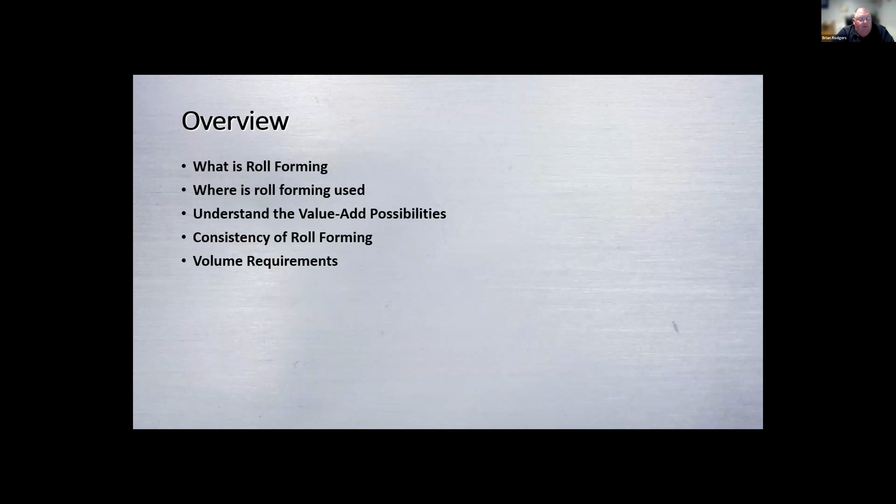We're going to understand why the roll forming process has the ability to add value by adding other processes to the roll forming line. Instead of just running a commodity, you can run a product that has more engineering and more processes built in. It may not run as fast, but at the end of the day it gives you a complete part without secondary or third operations. We're going to talk about the consistency of roll forming, and at the end, about the volume requirements that trigger when roll forming becomes the better option compared to other processes.

So when we look at roll forming, the first question is, what is it? Many people know what an extrusion is, what press brakes are, and what stampings are—some learned it in metal shop, some just heard the terminology in the industry. But when you bring up the term roll forming, sometimes people have no idea what it is. They may even have a roll former in their facility and not realize that's the operation. So we're going to see how roll forming is similar to these other processes, and also how it's different.

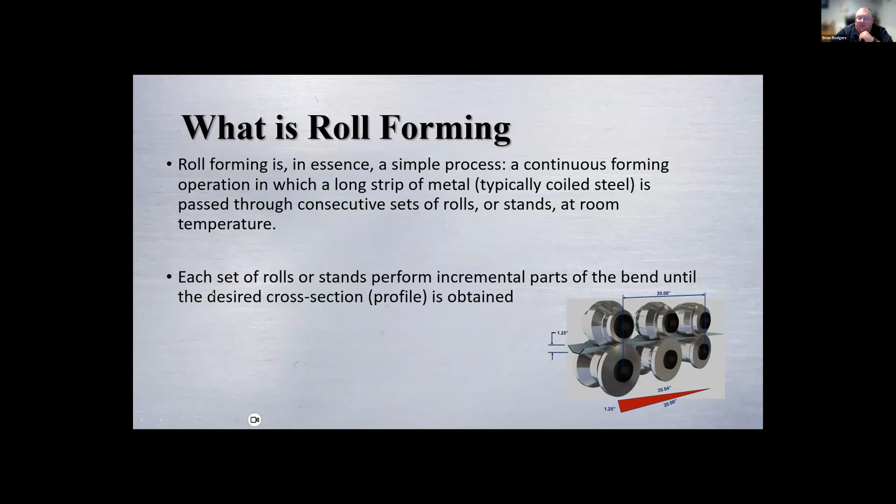So the question is, what is roll forming? Basically, roll forming takes a strip of metal and continuously forms it into a shape. As you see in the diagram, the material passes through rolls or stations. This is done at room temperature, and each station creates a bend, bend after bend, until it achieves the desired cross section. Each one of these steps is called a pass.

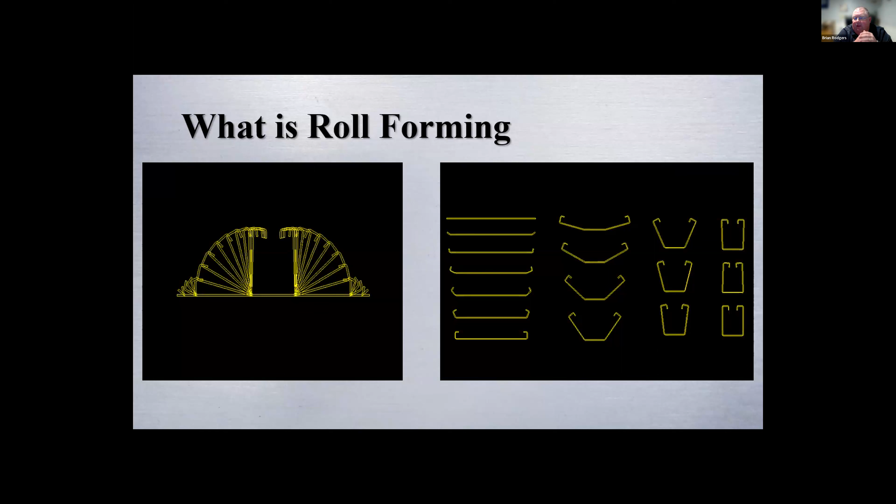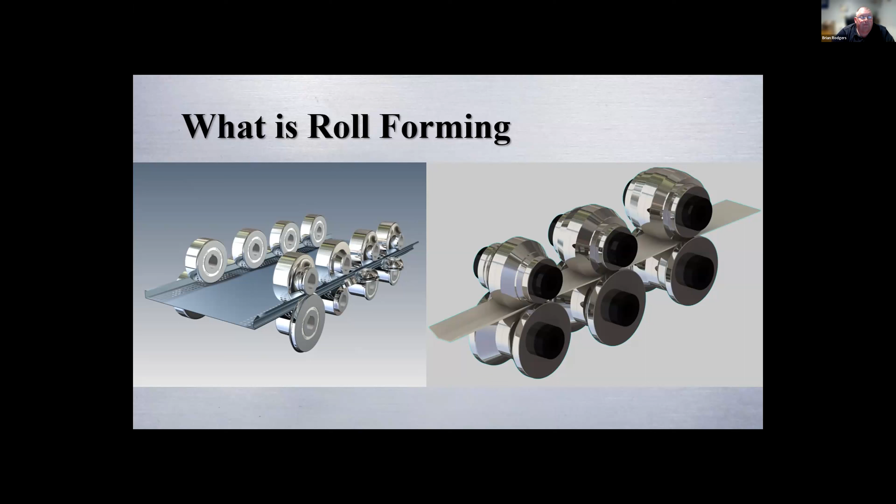So where is roll forming used? Here are some examples. In the automotive industry, Carl Yoder, who started the Yoder Company, and John Tishken, who started Tishken, had most of their machines in automotive. They had contracts with Henry Ford and other automotive suppliers in the Detroit and Cleveland areas, producing roll formed products for cars like running boards and other parts. The appliance industry also uses a ton of roll formers—everywhere from water heaters to refrigerators and ranges—with all different types of parts coming off a roll former.

The new buzzword, solar. Solar has been a really great fit for roll forming because it usually needs long parts, and roll forming does very well at producing long parts. The aerospace industry, if you have flown in an airplane, most of the stringers or the ribs of the airplane come off of roll formers.

They're used there. Office furniture, if you're sitting in a cubicle, I would say probably 99% chance that your cubicle's post and the interior pieces of your cubicle came off of a roll former. The construction industry, which is a lot of what MetalCon goes towards, your steel studs, furring channels and drywall stuff, that all comes off of roll formers.

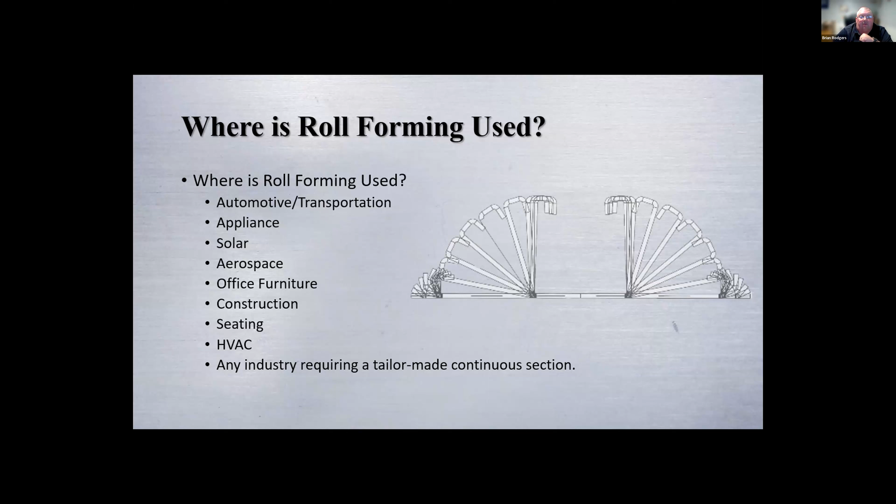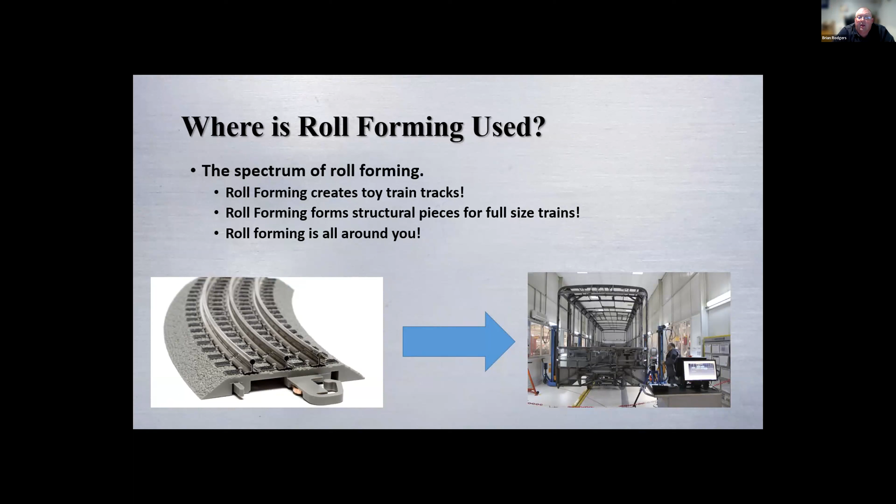So we're going to talk about some different advantages. Basically, roll forming offers many distinct advantages when it's compared to alternative metal forming methods. Most of these come from the ability to accurately process a variety of raw materials. We're going to talk about the different raw materials that can go through a roll former.

I hit real quickly on the multiple lengths that you can have the same profile, whether it be a 4-inch part to an 80-foot part. And the biggest thing that roll forming loves is high volume. It loves to make a lot of parts.

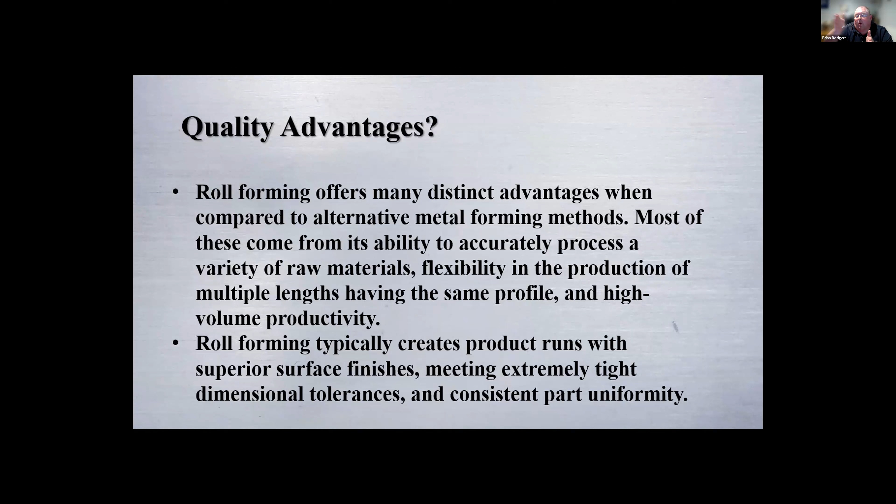Roll forming has the ability to run critical surfaces, whether it be stainless steel or pre-painted, different materials like that. By the way it forms the process, a lot of times it's able to create the cross section without cracking the coating, and it's able to give you a finished product, keeping it from going to another operation to either go through a buffing station or painting.

The range of roll forming, it can be less than 10 thousandths thick material to right around 1 inch thick. 1 inch is not very common, but 250 thousandths, 300 thousandths is pretty regularly done. Basically, you got to look at your bend radii and understand that. If you're at MetalCon, I do talk about materials, but the biggest thing is can the material withstand the bend that you're putting it in? And if it can, a lot of times roll forming can take care of it for you.

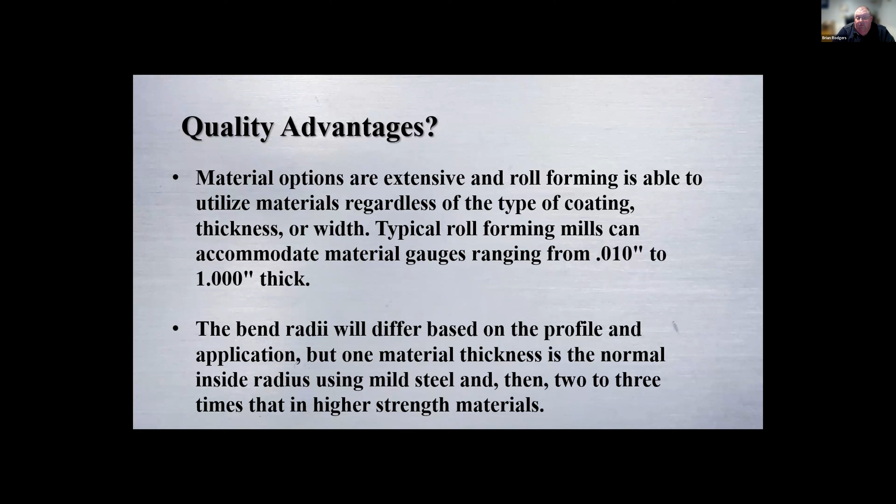It also has the ability to build mild steel, or as you hear in the automotive industry and more, your HSLAs or your high strength low alloy steels. Getting up into martensite materials and 80 KSI type materials are roll formed quite commonly now.

So here's just another list of some of the materials, and here's some examples of parts. Aluminum. I've been doing this for 20 plus years, probably pushing 25 years. And every time I've seen the aluminum prices go high, you see a lot of inquiries to start changing their products over to galvanized steel. And then when aluminum goes down, you'll see it go back the other way. I'll talk about some of the reasons for that later. You can roll form titanium, stainless steel, your commercial grade steels, your high strength low alloy steels, boron.

I've read an article about somebody who built a roll former and ran steamed wood panels through it to put a bend in it. Granted, it was a very tight bend, but that's what they were doing. I've also seen roll tooling made to roll cardboard. There's a lot of possibilities with the roll forming process, and I won't say I know all of them, because sometimes there's stuff out there that even surprises me. But understanding the process, knowing that whatever you want to bend can withstand the bend, means it has a possibility of being able to run through a roll form.

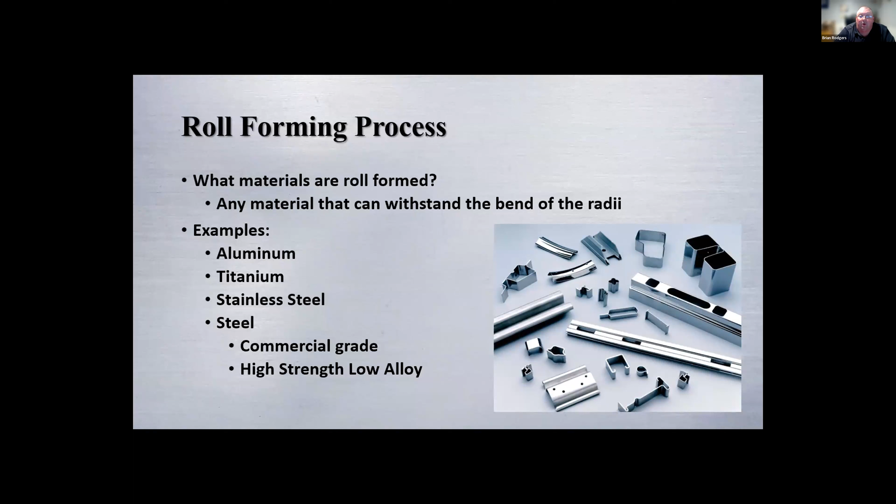So when we're looking at our products, real quick, kind of gut-checking: a lot of us know what stamping parts are. Obviously these stamping parts here, they're not a continuous shape, so that's the world they'll always live in. You're not going to do those on a press brake, you're not going to do them on an aluminum extrusion. That's pretty much their niche.

But now when we move over to press brake parts, a lot of times they begin as press brake, but as the volume goes up, they turn into roll form products. Like this product here, yes it's short, and depending on your volume it could be roll form. But if you need different lengths, this is a perfect roll form part because it's a continuous uniform shape. Then as we get into roll form products and want to start adding value, look at these parts - there's holes in them, some welds, and also the ability to marry two different materials together inside the roll forming process to have a tailor welded cross section, if your coil is welded with two different thicknesses, or you just bring the two together. We'll talk about that more later on.

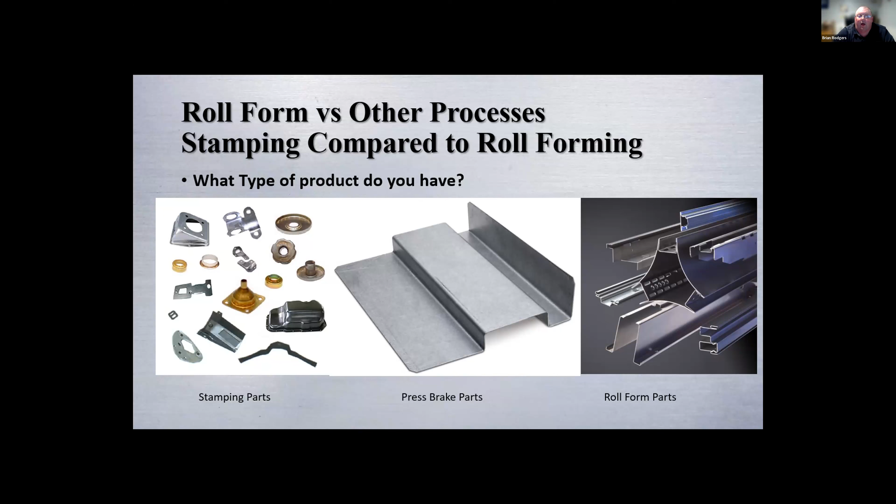So here we're going to talk about stamping. A variety of sheet metal forming manufacturing comes off of a press, whether it's punching holes, blanking, flanging, or coining - that comes off of it.

So when we compare the two, here's what happens. Roll forming usually holds the advantage in length, because if you're only going to stamp a 4-inch part, your die is very small. Let's say though the part is going to go on an automobile, for a side door on a minivan - well now that press bed's got to be maybe 36 or 48 or 60 inches wide. Let's say we want to put a sliding door on the side of a bus - well now that press bed's got to go to 80 inches or 120 inches.

With roll forming, usually now with the way controllers are, we just go to it and tell it to make an 80-inch part, make a 120-inch part, maybe we want a 400-inch part. We just tell it to do it, and it can make it very quickly with the same tooling and the same die tooling to produce the part. Where in a stamping die, that die has to grow because it hits one time and then it's done.

The tolerancing - roll forming is very consistent when it comes to the profile. When it's forming the profile from the beginning to the end of the coil, it will hold the tolerance very consistently as long as the material going in isn't fluctuating. It's the old rule: junk in, junk out. So if you're holding a good tolerance with your raw material, chances are you're going to have a very nice, consistent process going through the roll former.

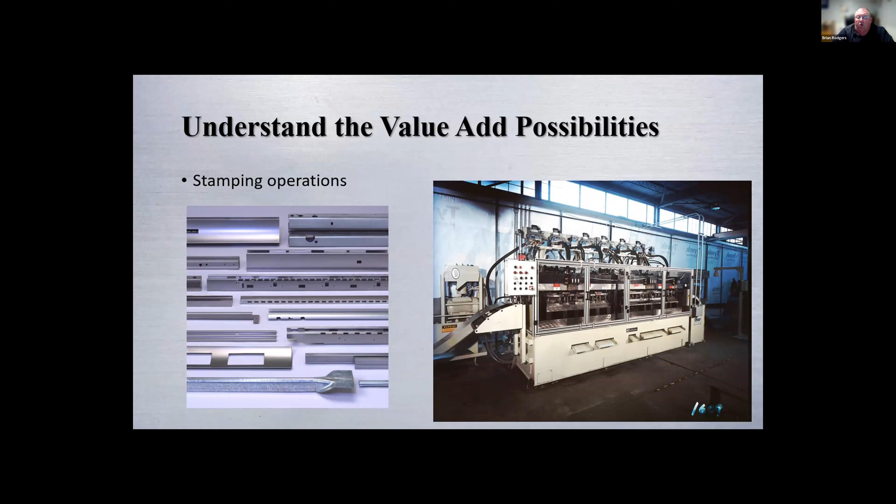As you can see, the material has gone through the press and it's coming out, getting ready to go to the roll former. So we've put a stamping operation in front of the roll former to create the ability to make different cross sections. As you see on the left, different roll form products, these all are in one process. So when the part is cut off at the end from a continuous coil, that is a complete part with all those holes in it.

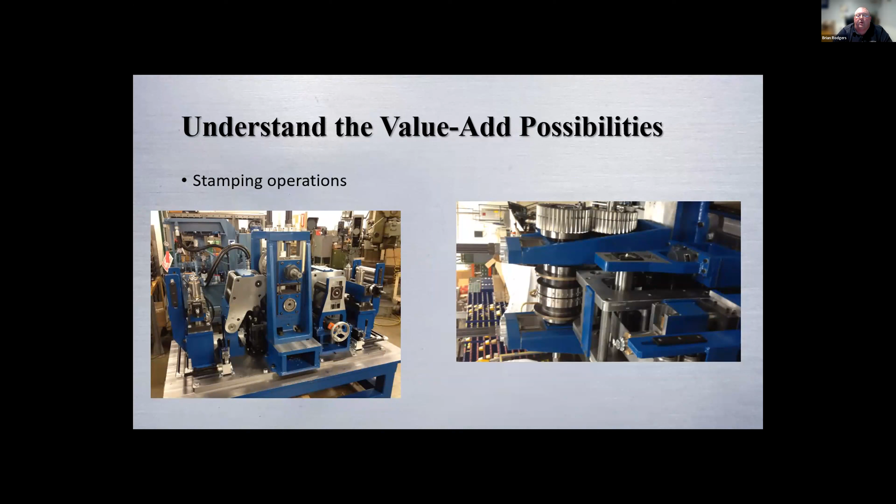Here's another way. Instead of just doing it with a press, we have what we call a rotary, where you can put that on. As you can see, this can run at high rates of speed, and it can put a continuous hole pattern in the strip before it goes into the roll former. We see this done a lot in the metal building industry on certain products.

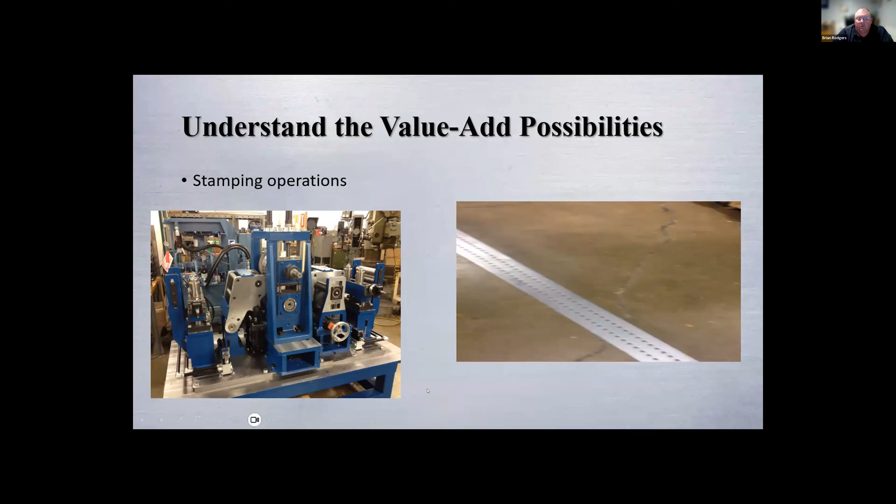So now we're going to talk about aluminum extrusions. In the aluminum extrusion process, they take the billet, heat it up, and kind of like pushing bubble gum through the dies, it creates different profiles. Very, very tight profiles, very good profiles, but there's no value add to them.

It's just the product. So when we compare them: length, yes, aluminum extrusion can make very long parts or very short parts. Tolerancing on the profile - aluminum extrusion holds very tight tolerances on the profile. But when it comes to putting a contour in the part, or a sweep, you have to go to another operation to do it, where we can do it in line on a roll former.

Tooling cost - as you all know, if you do aluminum extrusions, tooling is usually very inexpensive compared to roll tooling. But when you get to high strength materials, they call it aluminum extrusion for a reason, because that's pretty much the only material that can go through it. Otherwise, the metal you're pushing through it is the same as the metal it's going through, and it will destroy the dies. So when you're looking at those processes, that's one of the key things about roll forming - the ability to run different types of material, not just aluminum.

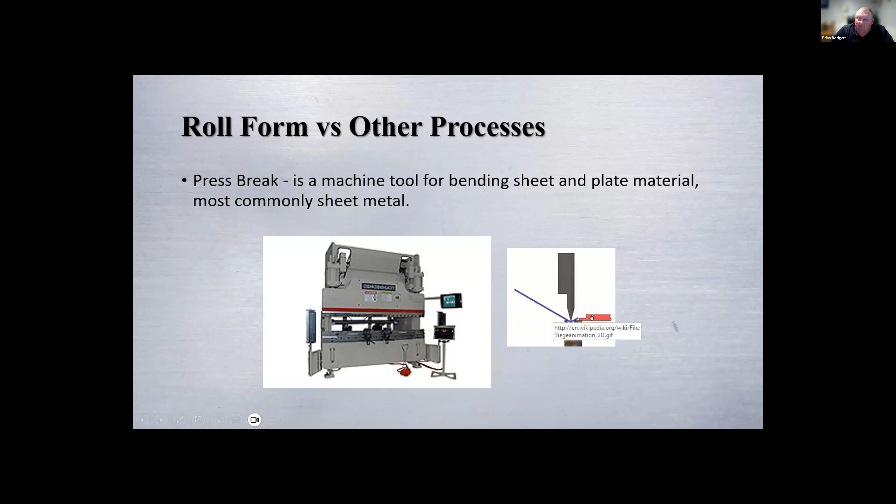So when we look at it, roll forming - like I said, we can run a 400-inch part, we can run an 80-foot part. In a press brake, it's how big is your press bed, right? Do you have a 30-foot long press brake? More than likely not.

Tolerancing - because of the way the press brake process is, you're hitting one spot, pulling out, and going back in. Roll forming gets tighter tolerances than press brakes. Now, yes, there are press brakes out there now that will hit and hit until they get it exactly right. But you're losing cycle time, where in roll forming, you're just passing through the rolls and getting the same tolerance, but at a higher rate of speed.

Sweeps - again, if you're making the profile on a press brake, you're not putting a contour in the part, you're just making it. With roll forming, we're forming the profile and we have the ability to put the sweep in before the operator even touches the part.

Tooling costs - as we all know, press brakes are pretty common, very inexpensive, but how many times do you have to do a tool change to get a part done, depending on what the profile is?

Where in roll forming, once you design the rolls and the rolls are on the machine, it's going to make that part all the time. High strength materials can be done by both, yes, but you have to play around with setting those hits and getting that radius set coming off of a press brake. In roll forming, we're passing through the rolls and the way it's forming it, it's bringing it up. Once we have that, it's very repeatable to load the tooling, take it off, put it back on, and achieve that same tolerance and consistency, even with high strength material.

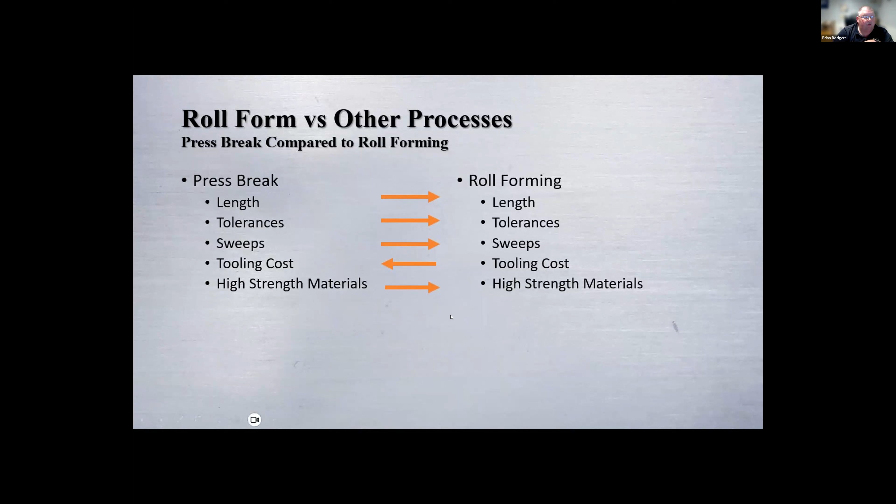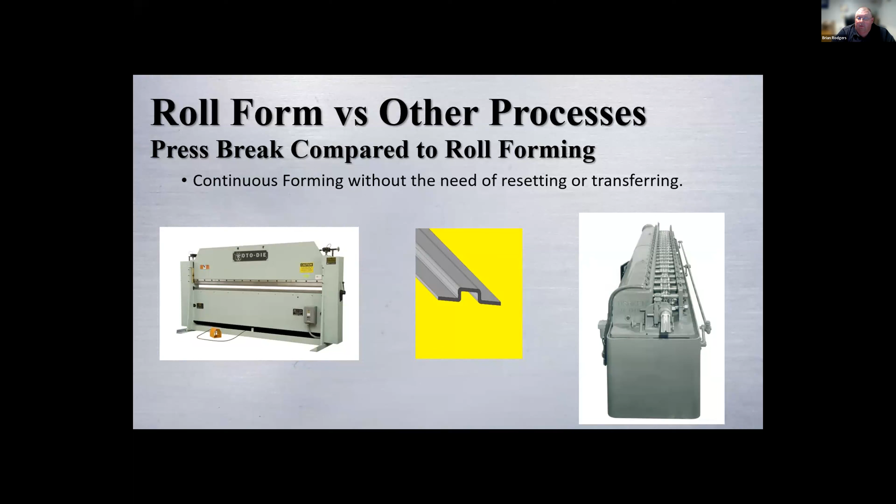So you've heard me talk about the consistency of roll forming. When we're looking at that consistency, you can see the material coming in. I like to call this the forming V, because if you're standing at the exit end of the roll former and look down, or at the entrance end looking through the tooling, this is what you see. The material comes in making a V to finish the cross section. It's flat, it bends its edges, comes in, and then you see it starting to lift. As it carries through from station to station, it's producing the final product.

A lot of times, if you think of a progressive die in stamping, it's hit to hit to hit. But instead of a transfer or a person picking the part up and moving it to the next station, we're just traveling through. Instead of our ram coming up and down and stamping the part, we're rolling, just passing through and bending it as we pass through.

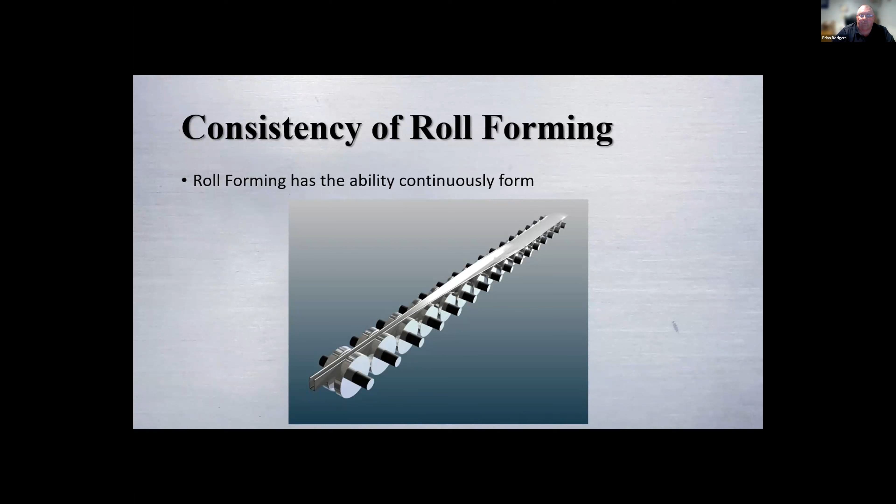So when we look at the ability to form a profile, a very standard tolerance is plus or minus 30 thousandths of an inch on any dimension. Can we do tighter than that? Yes, we do it all the time. I've seen plus or minus 20, plus or minus 15. I've also run certain products like seat tracks where in certain areas of the cross section we're holding plus or minus 1 thousandth of an inch. Now, granted, if we're holding that tight in one area, we need a little wiggle room somewhere else, so we can't tolerance the whole thing at plus or minus 1. But there are certain areas of a cross section where you can achieve those types of tolerances.

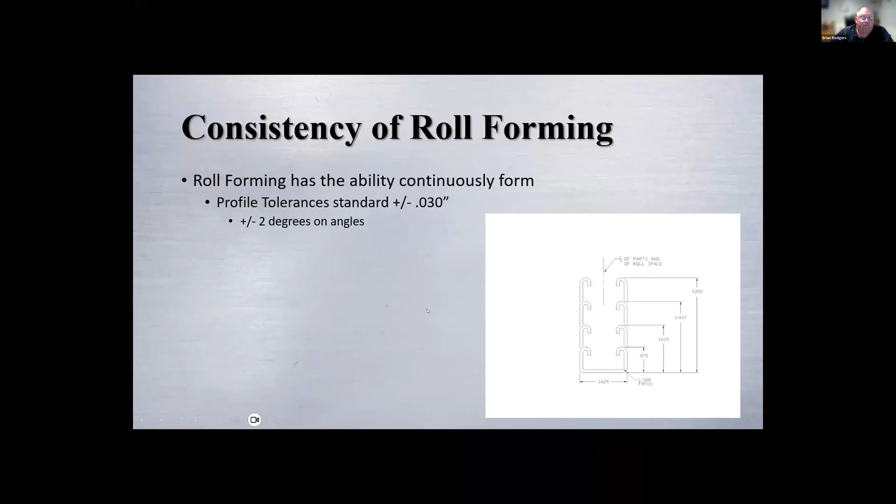If you're taking notes, this is pretty good, these are very attainable roll forming profile tolerances. If you're talking fractions, it's plus or minus 1/32. For 3-plus decimals, plus or minus 15 thousandths. Certain dimensions can be plus or minus 5. Like I said, in certain products we've gone tighter than that. But you start talking about the material, the profile, the machine, and everything, it is achievable. Sorry about that.

On straightness, usually it's 1/4 inch in 10 feet. That's for the crown of the part, the sweep of the part, or twist, when the part comes out and wants to go clockwise or counterclockwise, we're able to hold those.

I do a lot of estimating and putting lines together, and my thing is, I need to know what's important to you. Because if I sell you a machine that holds plus or minus 30 thousandths of an inch, and you're just measuring with a tape measure and don't care if it's within a half inch, I could end up selling you the wrong type of machine that holds a tighter tolerance than you need. We can focus on what you're really needing.

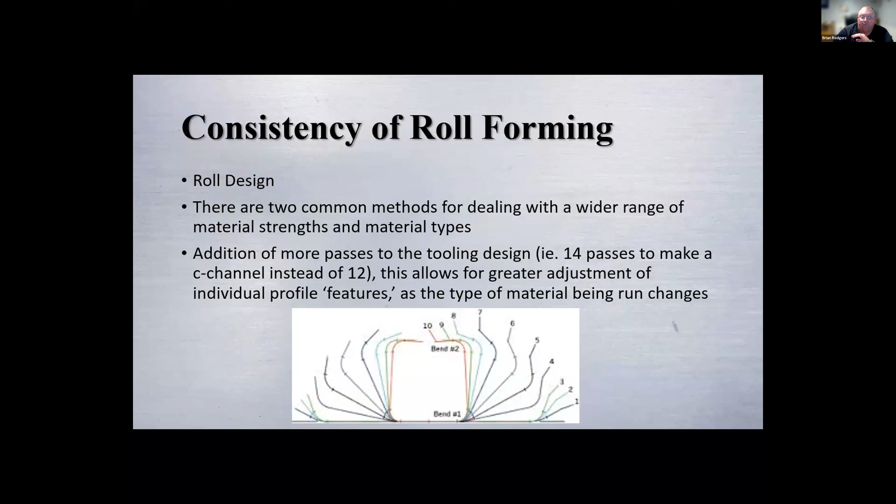Can you do better? Yes, it's done better all the time. It really depends on your material, whether you have the right machine size, and if the tooling is correct. Camber or sweep or down bow, everybody has different terminology for it, but it's 40 thousandths in 40 inches, and bow is 40 thousandths in 40 inches.

Just a note, if you're looking at a roll former, or have a roll forming process and want to add automation, which is a big buzz now because of labor shortages, make sure the tolerances of the machine supplying that match what the automation needs.

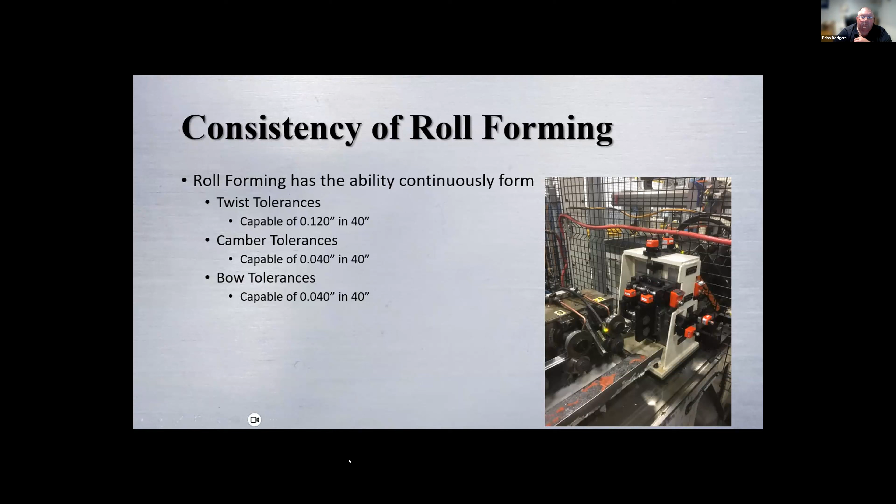So as the part profile is produced by the roll form tooling, it goes right into this operation, and we're able to manipulate that part to go left or right, up or down, or even come out with a purposeful helix or twist to follow wherever it's going to go.

Drum rings, if you think about it, those come off of roll formers and sweep units. Bicycle tire rims, motorcycle tire rims, those all come off roll formers. They go through what we call a shoe, and it comes in and makes the circle, and you cut it, and then a lot of times the rim comes down and the operator just butt welds the rim after it's cut. So you have one operator taking the material from a coiled flat, coming in, and making a finished product. It's one operator going through all those operations because they're all tied together.

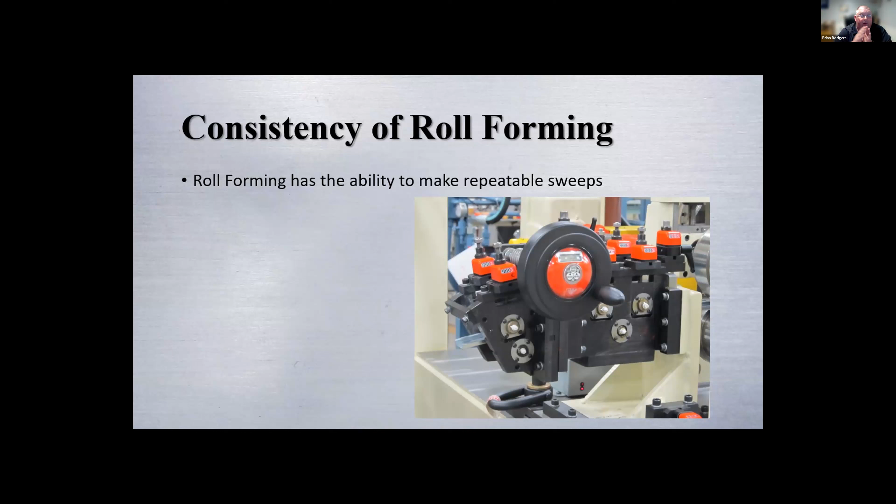It will do both. The one thing I will tell you is if you are going to blank feed a roll former, you'll want to make sure your minimum length is 3 times the horizontal distance. I don't talk a whole lot about that here, but I will at MetalCon, where that measurement comes from. There are tons of products that come through a roll former from blanks, not from continuous coil. Why? A lot of times you don't have to buy the extra presses, and you don't have the volume for it, or you don't have the room, and you just run your blanks through and you're very happy with the product.

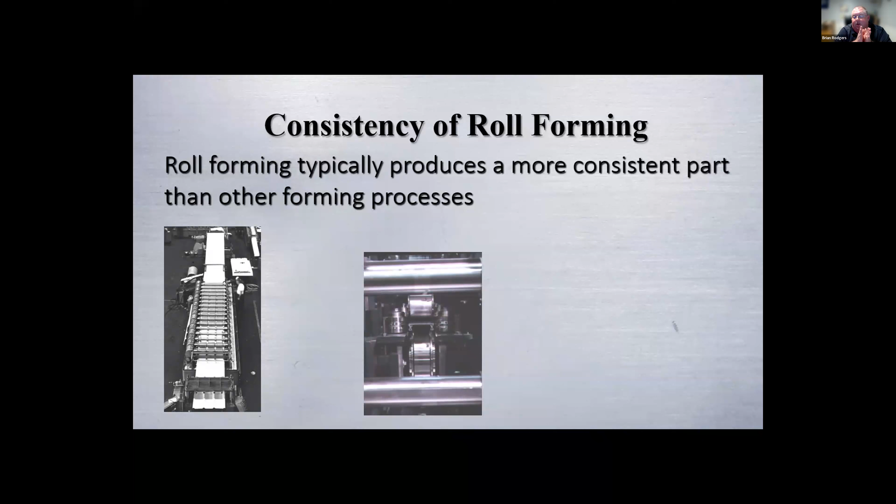But this comes off very consistently, because when it comes together, they want to make sure that a 105-pound person who's going to move the seat forward and back on a car can do it with the same amount of effort as a person who is 6'5", 295 pounds. So it's very important that part of that cross section is held that way, so that when they put these pieces together with the ball bearing, the efforts are within the allowable tolerance.

Here's another example of different sweeps that come off the part. As you can see, this is an automotive cross section. It's really hard to tell, but it's actually bending in multiple directions, so it's got a helix in it. This is a part that would come off one of those shoes. You can see how tight the diameter is. Some of these other parts have a small crown in them, or could just be straight, just to show you what can come off a roll former.

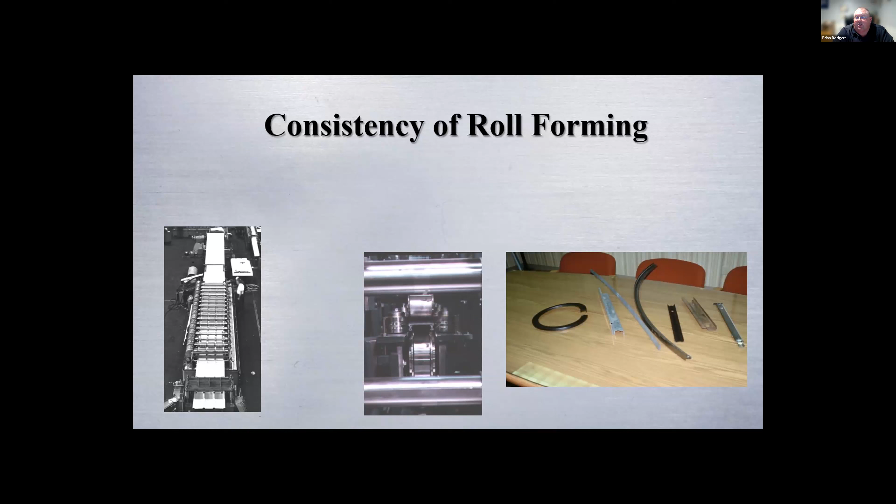I used to work in the automotive industry for a while, and we would go from product line to product line and use the same cross section, but we would put a different, they called it cord, but it's basically a different sweep in the part. So one might be more gradual, one might be sharper, depending on the vehicle it went on. We would just change that with the sweep unit, and we wouldn't even change the tooling. So we were able to change over very quickly, utilize the rolls, and make the same cross section, but completely look different when it came off the line.

When I talked about the flare, this machine here is an anti-flare device. What that does is help set the end of a profile. When it cuts off, it does flare out beyond the tolerance, and we're able to monitor it and set it automatically on this type of machine.

There's a lot of different ways to take care of flare. You don't have to be as elaborate as this. We can put different things in the tooling, different side stands or different side rolls, to help work with the roll tooling to eliminate flare. These are just some examples I wanted to show you.

Here is an example of a blank fed line. It's one of those dual head or duplex machines that I was telling you about. Another one is a continuous coil going through multiple operations. We're going to talk about the one on the left here, the dual head machine.

A lot of times these are used when you're doing different size panels, and all you want to do is form the outside edges. So if you have a 24-inch wide sheet and you want to form just the edges, you put that profile you want on each edge. But let's say your next product line is 36 inches wide - you just move the roll former, it'll index out, allow for that wider strip, and put the exact same profile on the side.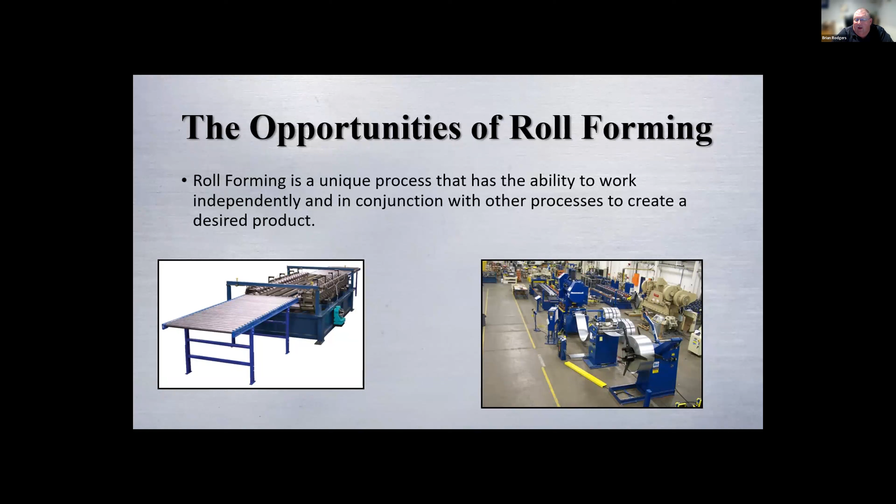Also refrigerators - the one we see on the right is a continuous coiled machine with a pre-notch or pre-punching operation. So we put a stamping operation in line. It comes off the coil, going through a straightener, and when it comes out of the straightener, it goes into the press. The press puts whatever features are desired for the product, then it goes into the roll former, which creates the profile, and then it's cut off.

Here is a little different example of that blank fed line. This line is actually taking sheet of steel, putting it on - the roll former is back here. It's coming through, bending the edges, and then it comes into another operation where it actually forms the exit and entrance end. These blanks are coming in from a stamping operation with the embosses in it.

As you can probably tell, this is a door. This roll former is able to run all the different door families by putting the profile on the edges, and then this other operation puts the features on the end of the part. That gives you one operator and a complete part when it comes off - the savings come from adding all that value into the process. It's not just a roll former, it's a stacking operation, a roll forming operation, and a press operation.

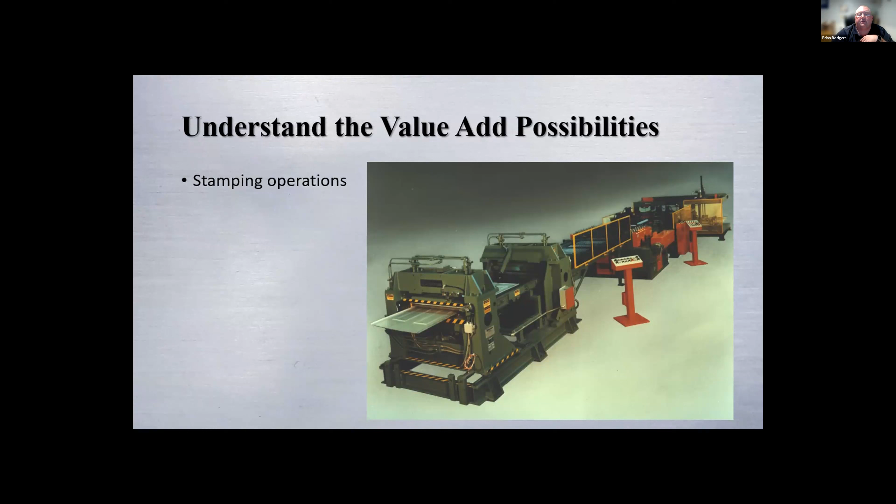And this machine here - let's see, it's supposed to move it back up. I was supposed to play it larger for you all to see.

But we can watch it. It goes through, you have a cutoff operation. This is what we call a post notch. So we actually are punching the part with 2 different presses on the exit end.

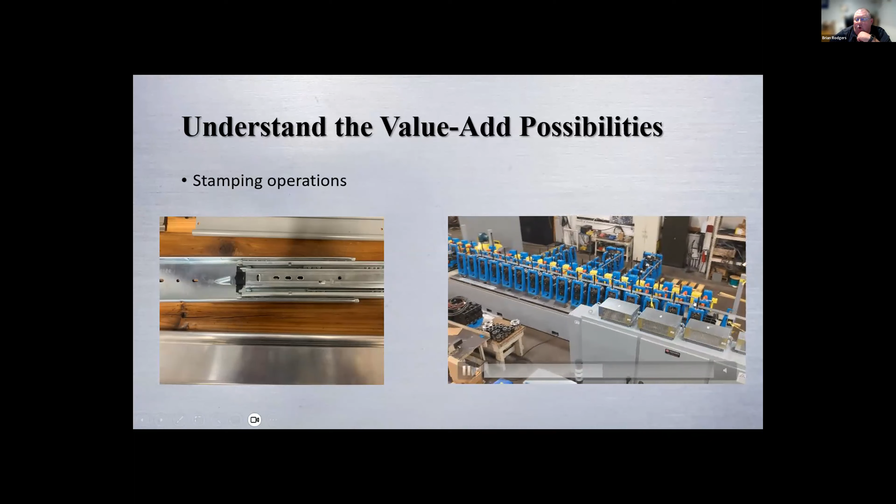As we're going through, you can see that the part was being manufactured from the roll former and a continuous coil. On this machine, it ran all 3 cross sections. We call these rafts that are sitting here on the floor, and these rafts would come in exchange with these to run the 3 different profiles. It just so happens on this one, we're not using the beginning of the roll former. So we're just running the coil over top, and then we're dropping the coil down into the forming stations here at the split of the roll former.

And then as you can see, you see the strip, you see the tooling, and then the part is going through, it's being formed. It comes into a straightening process, and then it comes into the presses.

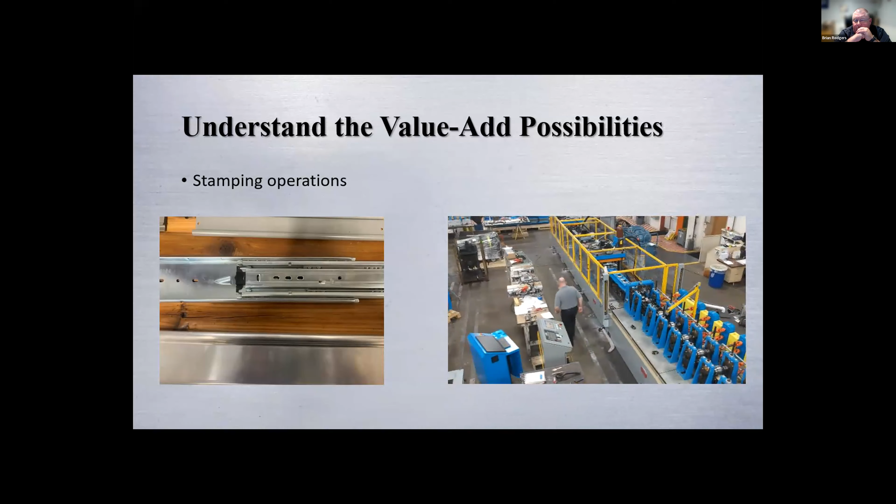On this part, there are actually 3 presses at the end of the line that are in line being used to produce those parts. So this press here would be doing 1 set of holes. There's a small press here, and then there is a cutoff operation.

Here is another one that the pre-notch operation. Hopefully the video plays. There we go.

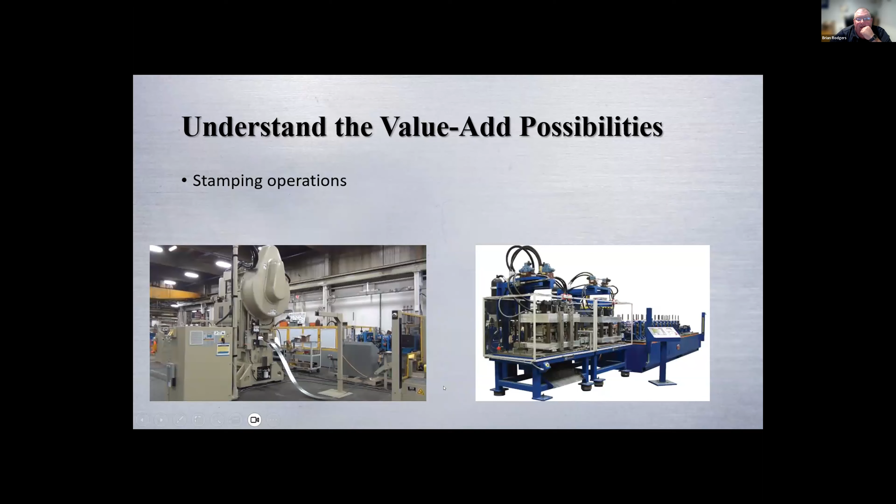This here is making a repeating pattern. This is at a slow rate of speed, but in actual reality, this line is pushing almost 200 feet a minute. It puts these holes in, it comes through.

Trying to give you a better shot. You can see the stamping operation and the hole pattern that it's giving, and it has a set distance between each hole to the part print, and then it will go into the roll former.

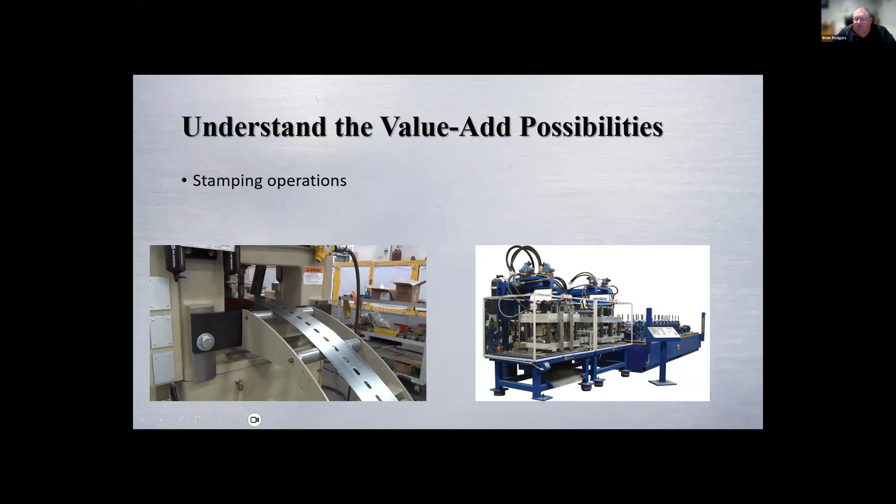This other machine here on the right, this is another post notch operation where it is coming out of the roll former and some type of feature is being put in, and then the cutoff operation is happening next.

This is a simple roll former. It's just a continuous coil. It's coming off the coil, running through the roll forming machine. It's coming through a straightening device, which this would be an Amco block. And then it comes through and it comes into the cutoff press.

Once the desired length is hit, whether it be by a flag style like it was back in the 80s and 90s, or today with controllers, we use encoders and electronic counting, and it knows when to cut the part. It cuts the part, the die moves forward during the cut, and then after the cut is complete, it goes back to home and it's ready.

These machines, this here was a slow example, but 100 feet a minute is very common, all the way up to, there are actually machines that run over 500 feet a minute.

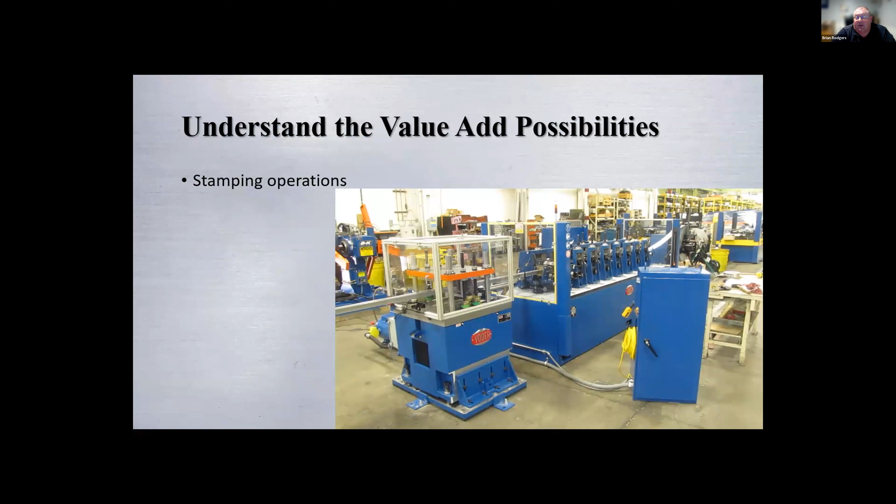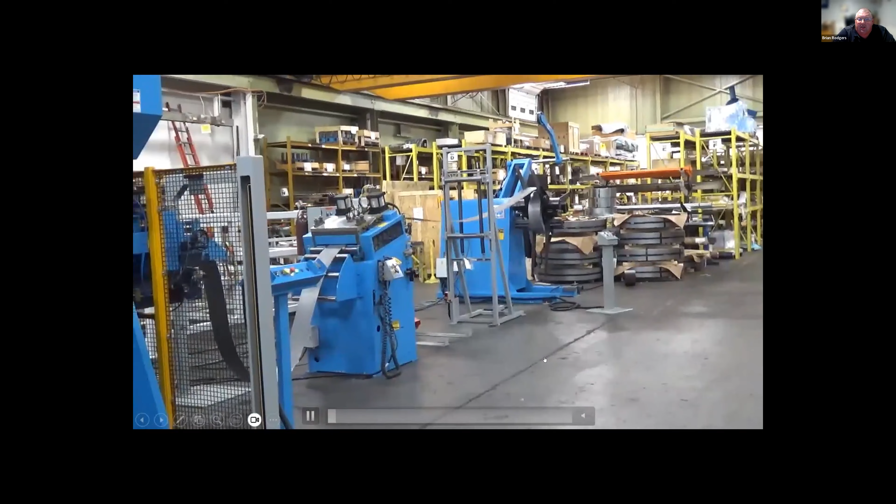This is another one showing different stamping operations. Like I said, we're coming off of a reel. We're coming through a straightener to take any camber or any coil set out of the coil. It's coming through with the different press technology.

We put different holes in. We can set the holes at different distances apart for different part lengths or different features in different areas of the part. It comes in.

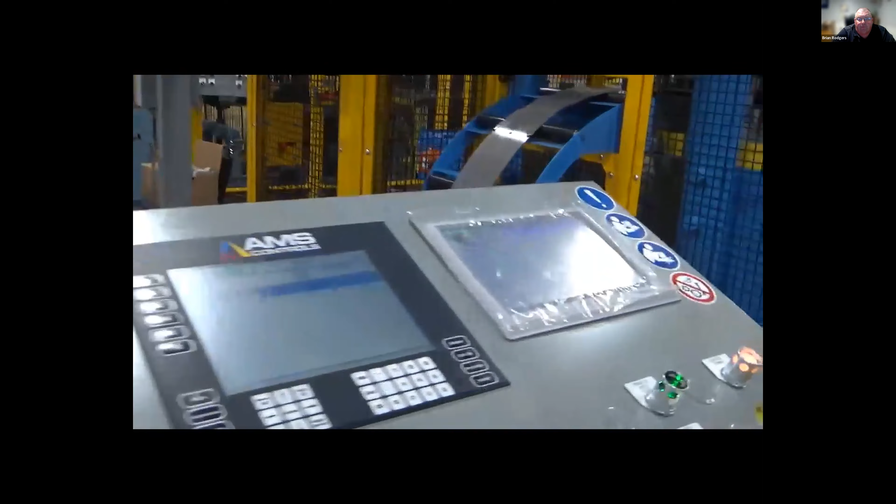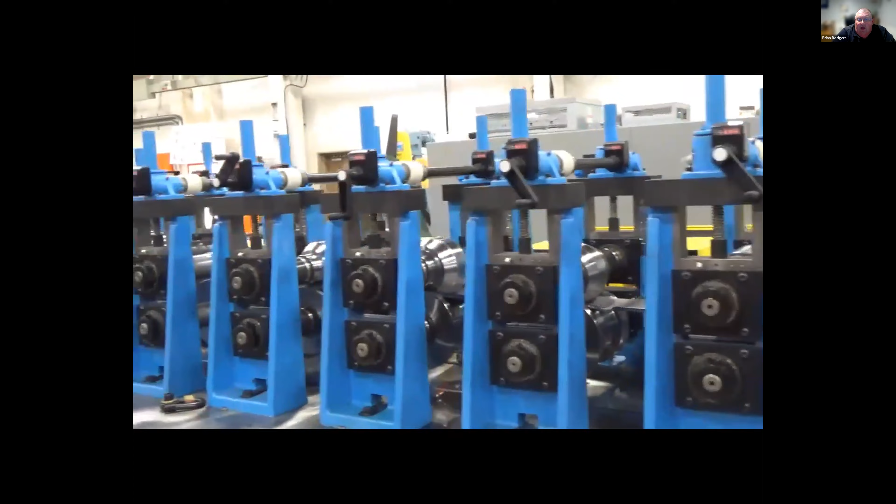Here's just the example showing this part is 72 inches long being ran, comes through, it goes through each one of the forming passes. As you can see on here, the edge of the material is actually taken away.

So we started forming it in the middle and we started breaking it up. So all those features are in the part. And as it's coming through, it's bringing it up.

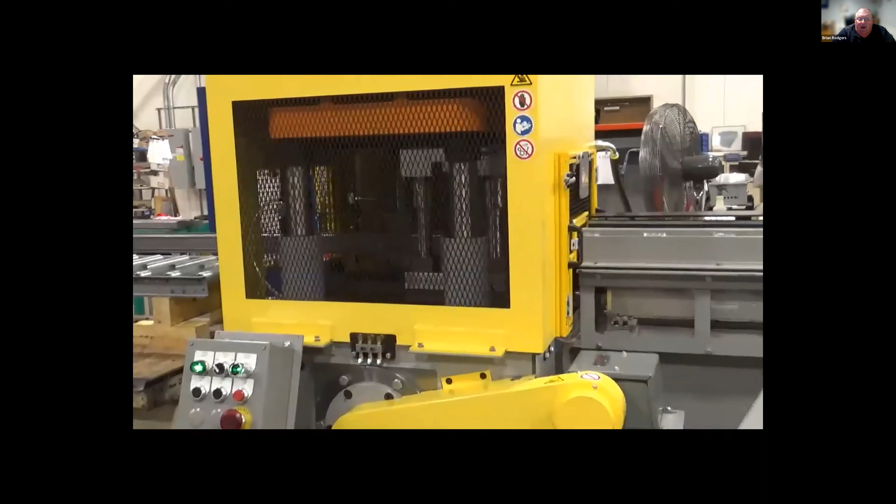There's one of those side passes I talked about earlier to help make sure that those legs are made correctly. And then we come into the cutoff operation where it will line up and it will cut through that feature, and it'll make sure that the part has the feature that's desired on the end of the part and on the exit end of the part in the correct spot.

As you can see, the roll former's footprint is the same, but the part lengths could be 72 inches long, it could be 112, or it could be 36 inches long. It's just a matter of what we set the length at to do that.

Not only presses, we also have the ability, whoops, back that up.

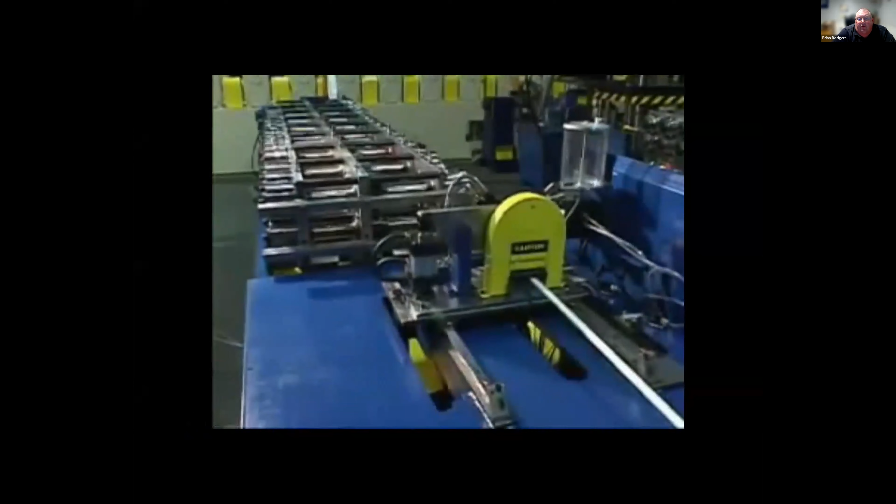This is a cantilevered machine. This machine actually has the ability to have 4 sets of tools on it, but it actually is running a flying saw. It's not even a die. It is a saw that is sawing the part.

This part here is in the window industry, and it's doing a small aluminum part, and it's actually sawing the part off instead of cutting it with like a guillotine or a slug or a crop cut operation.

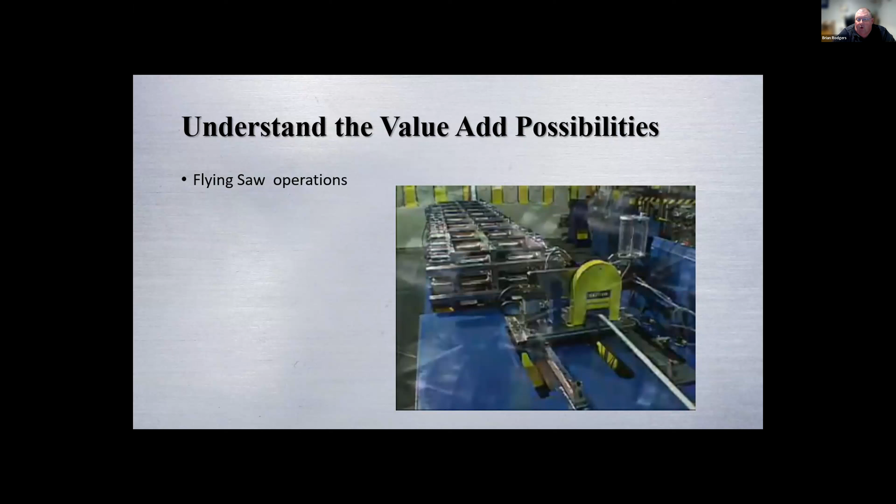Then we get into some of these, like this machine here - it's a more automated machine. It runs at a high rate of speed, and it runs a lot of the metal building industry parts, like your 2x4s, 2x6s, and 2x8s.

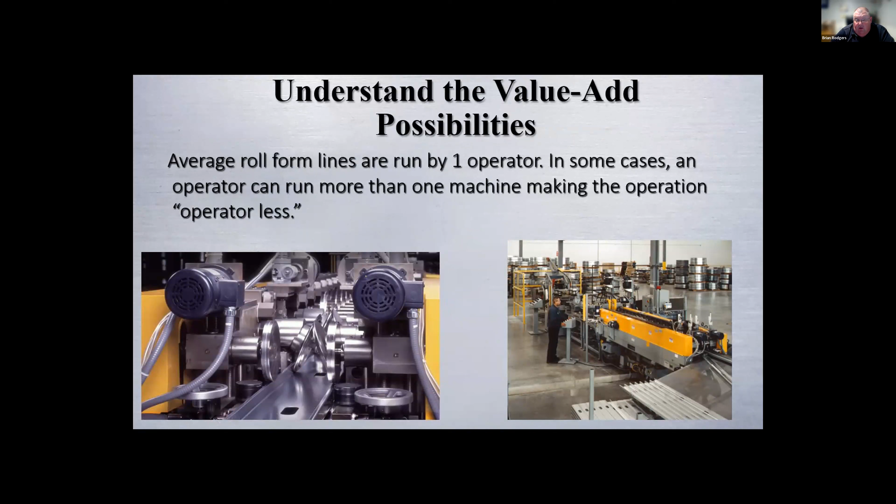Basically, it takes one operator, or sometimes it can run - if everything has a stacking system, it doesn't even need an operator, it just needs somebody to monitor it.

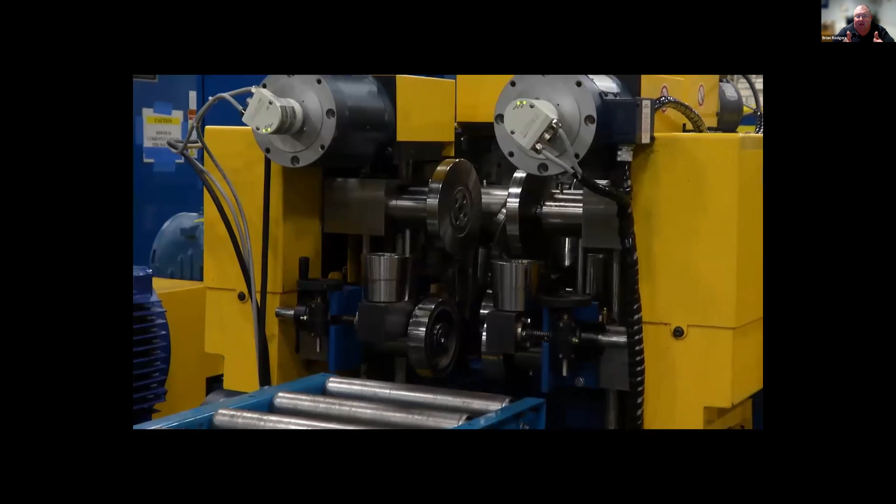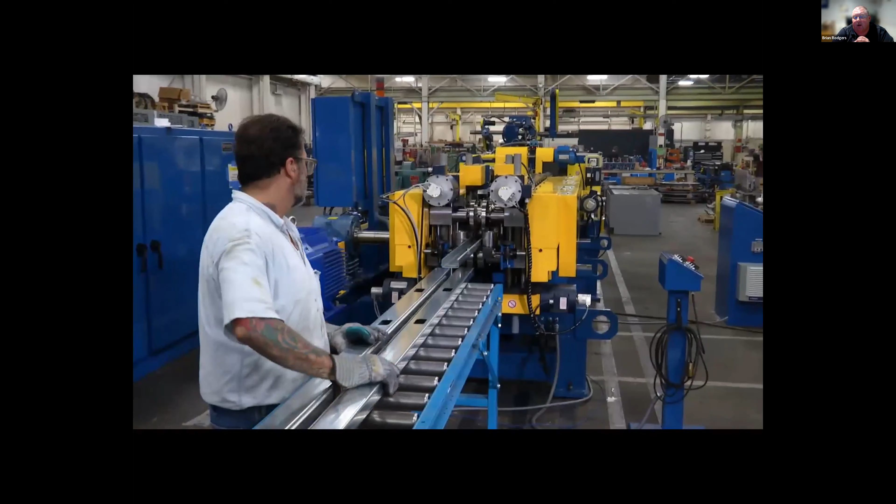As you can see, it has the ability to index in and out. There's that flare unit we were talking about on the end. The material goes through, and as you can see, it puts embosses in the edges of the product in line, and it's forming the part. It's putting holes in the part.

And it's able to make your part complete with the different web sizes. These machines run between 300 and 500 feet a minute. A lot of times these parts are commodities, so running fast is very important to the end user, to be able to make a lot of product in a short amount of time.

We talk more about value add, what you can do. This part here is not only roll formed, but it's also adding a vinyl strip to the cross section. This is a damper blade in the HVAC industry - it's like a seal on the louver. So when the fan comes on and the louvers open up, but when it closes, it has a seal on it. We're installing the seal into the cross section and crimping it, so that it's complete.

They just need to install it into the framing of the louver, so that it's all complete and they don't have to try to attach the seal separately. The seal is being done in line.

Back when I was younger, if anybody remembers riding in the old pickup trucks, when you rolled your window up and down you had that black flocking, or fuzz, in there. That came off of a roll former - that window channel. We would actually put glue on that material and incorporate it in the roll former. Then when we cut it off, that window channel was cut with the flocking already in it. So we were adding that flocking to it during the roll forming process.

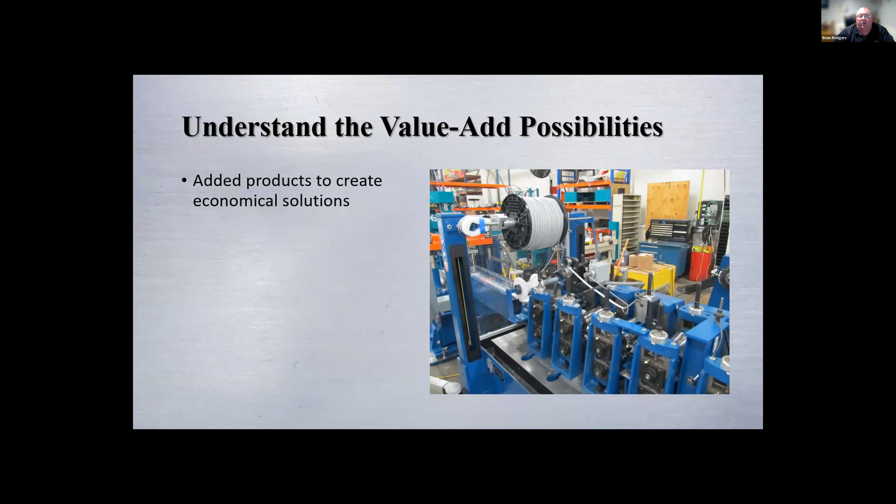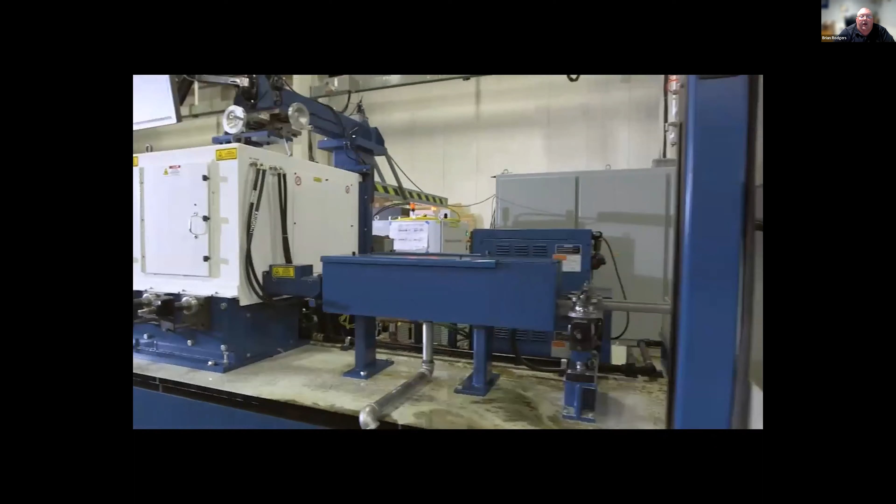You can weld - here's just a laser weld part. It's kind of a neat video, but this is a roll former, tube former. It's coming through, and it's actually making stainless steel tubes for handrails.

As it's coming through the line, the edge of the material will be conditioned by brushes. As you can see there, it's being prepared for the welding operation. It will go through the forming operation to create the round section, or the tube.

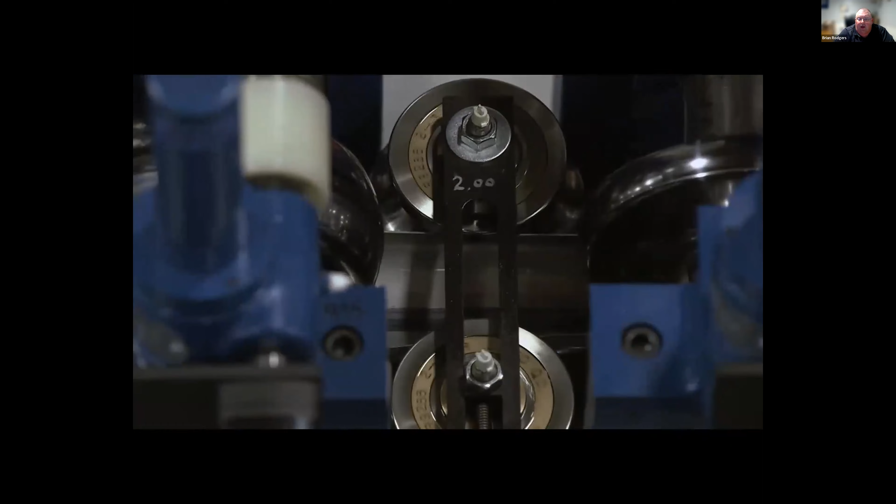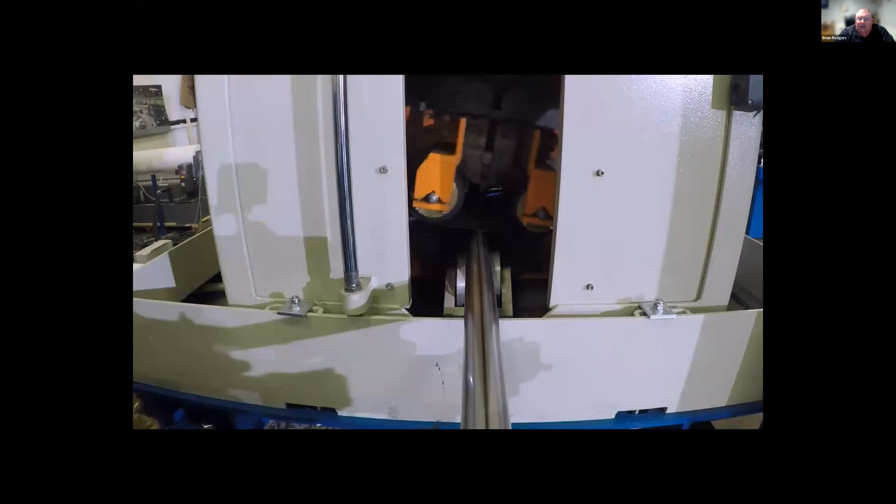On this particular one, it could be different shapes. It will go into - this is a laser welder - the laser welder will join the two edges together. This is a sanding operation where it's sanding the weld in line still. And then after it leaves the sander, it is going through what we call a calibration mill.

The mill is resizing it, making sure it's to spec. Then when it comes off, it is being cut off by a saw. After that it goes to the next operation, which is a deburr operation, where both ends of the part are being deburred, so there are no burrs on the part.

Just another example of where roll forming is used, and how different processes are added to the roll forming process to create a higher valued product.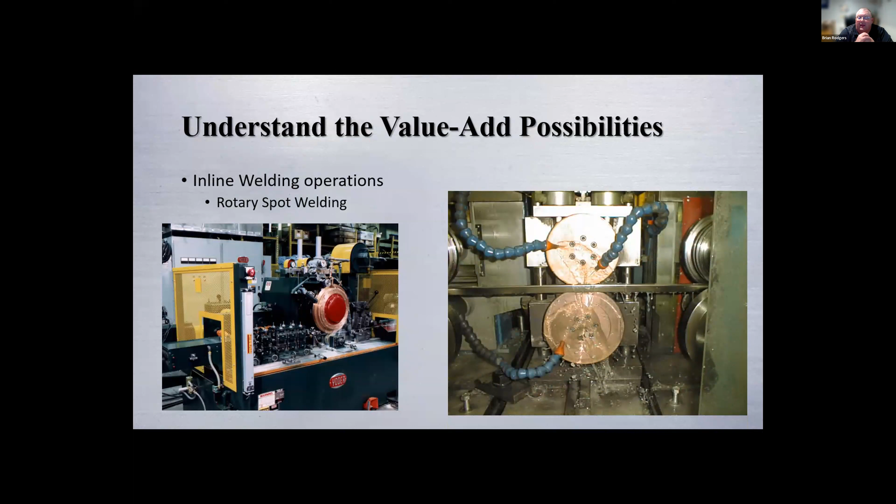Here's just - I threw this in here to let you guys understand the whole world of roll forming. These are rotary spot welders, and these are basically another welding operation that can be added into your roll former if you wanted to have welded parts. And then this is a high frequency welder, which would allow you to run very fast.

These are step beams that you see in the pallet racking industry, but there's these types of - I call them custom profiles for whatever your needs are - and tubes. Think of your fork trucks, your high-lows, the rollover bars that come off of roll formers, tractor cabs, combine cabs, frame rails on semi trucks, framing in different frame rail pieces and automobiles. They're all with these different welding products, and they come off of roll formers.

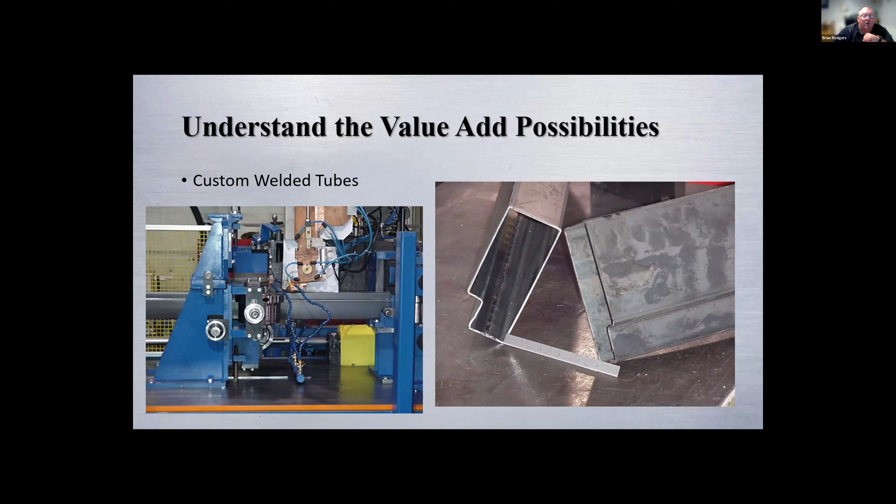There's also TIG welding. TIG welding is kind of phasing out because it's not allowed for a lot of speed applications, but it is still being used.

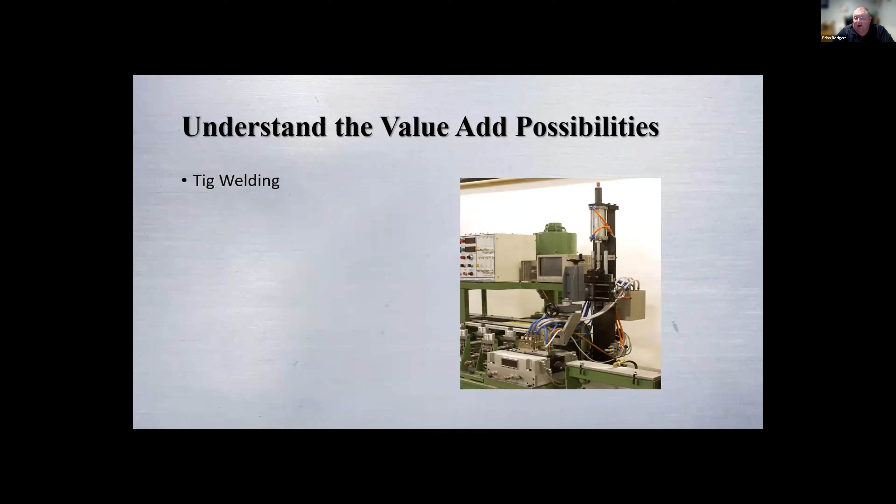When we were talking about roll forming, I wanted to discuss some of its advantages, because right now in the manufacturing industry we are short of labor. So we have these things to set the roll tooling, like single point adjusters, where you set to a number instead of using old feeler gauges.

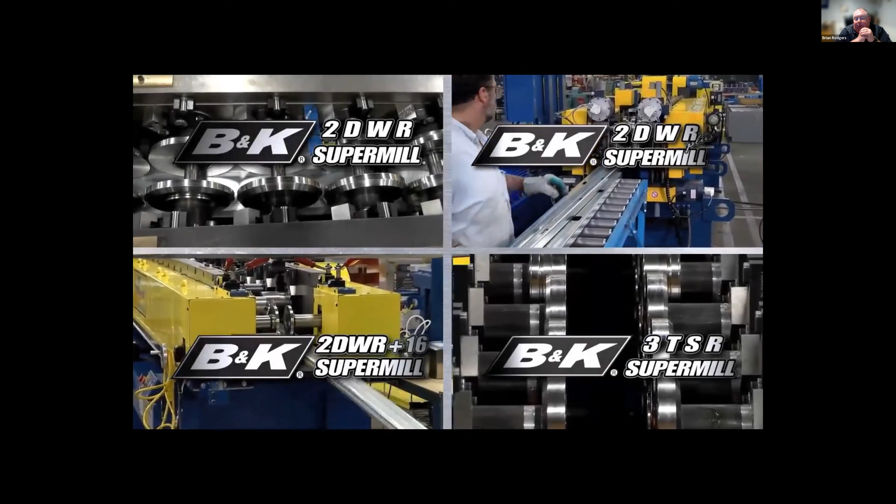As shown, this is a drywall framing machine that will automatically, at the push of a button, set and run all your different sizes. Or you can hand crank it, as you see him taking it in and out for different widths, whether it's an inch or 8 inches wide.

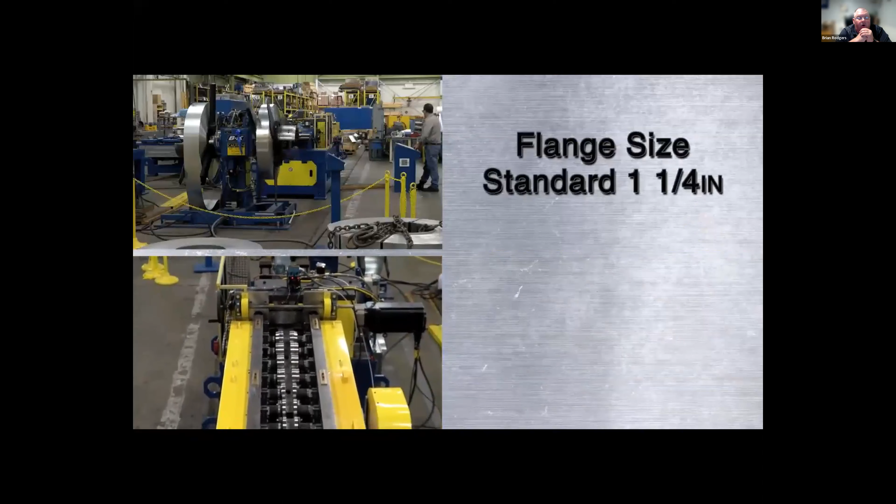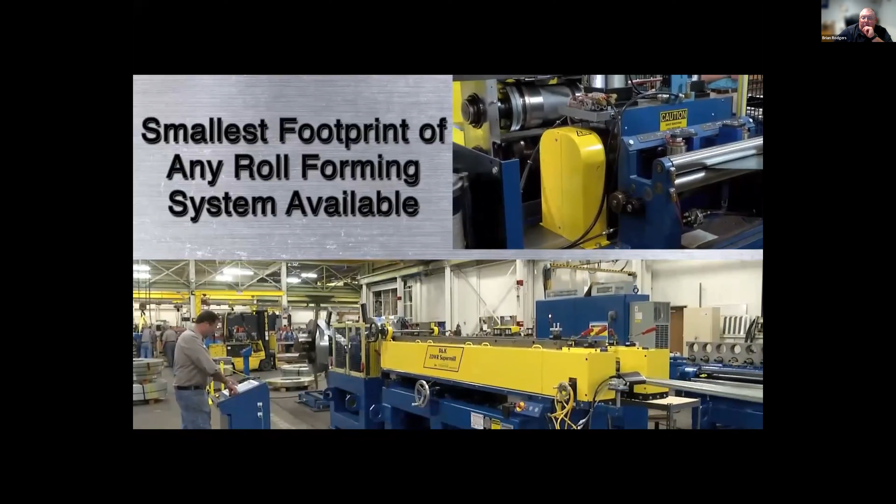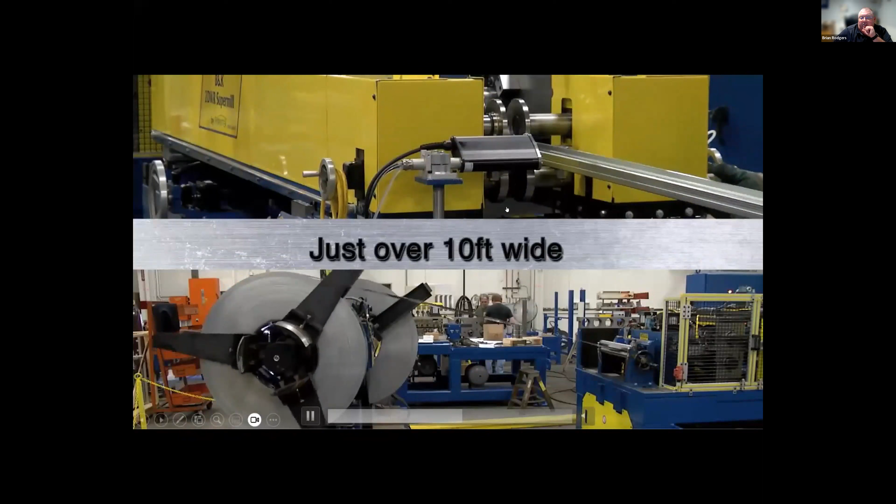And then you can either have a flange or take the flange off. As you can see, it makes parts at a very fast rate. What's unique about this machine is it's actually a coil fed, blank fed line, because the shear is before the roll former, and we're also putting inkjet spray and labeling on every part coming off the machine.

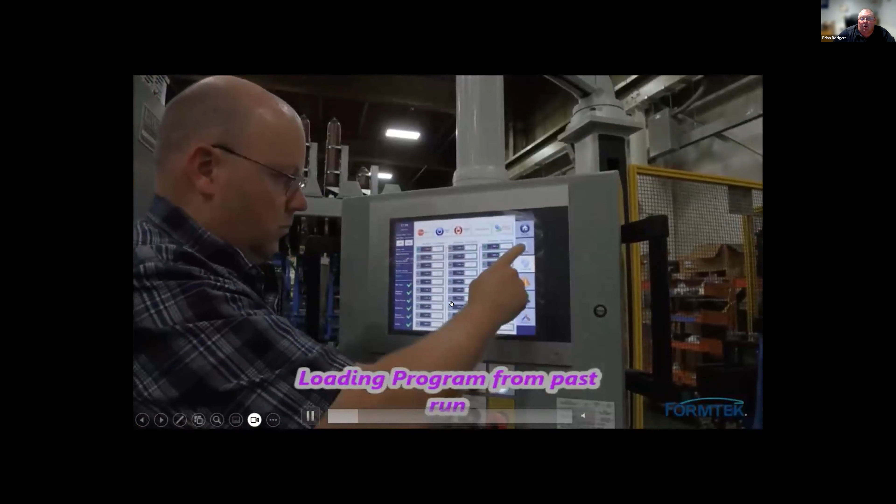I'll go ahead and exit this and move to the next one. Here is a machine where instead of single points, you load your program, and the program has all the settings. Your operators bring up that recipe, type it in, and tell it to set. It will go ahead and load the mill.

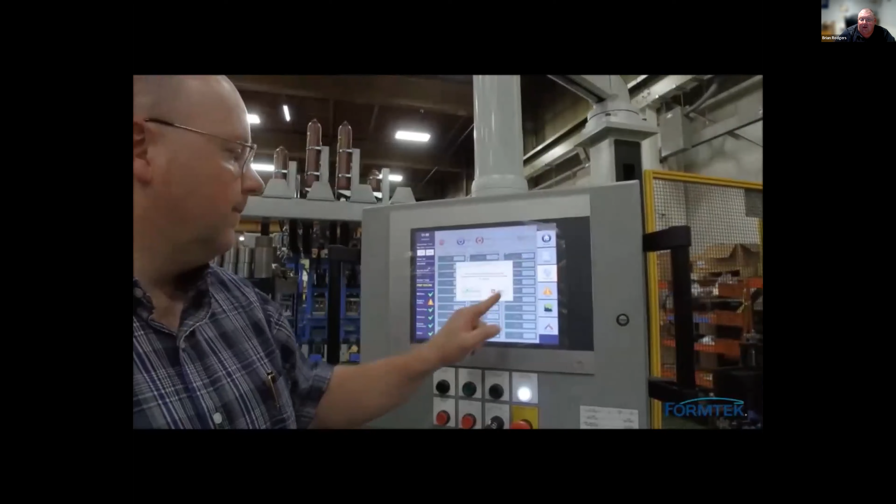It will load those settings and set the roll tooling automatically for everyone, done in a matter of seconds. I'm watching my time, hoping you can see it happen here. He's going to advance it, and as you can see, they are automatically being set to the proper tooling setting.

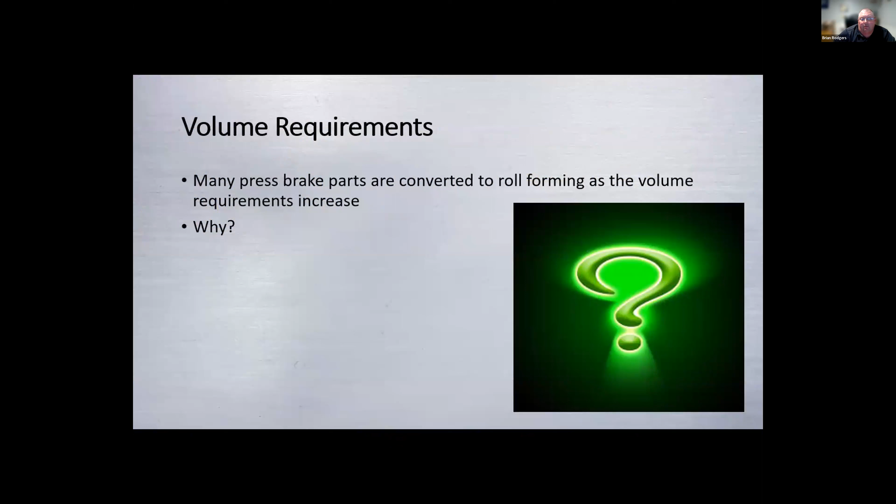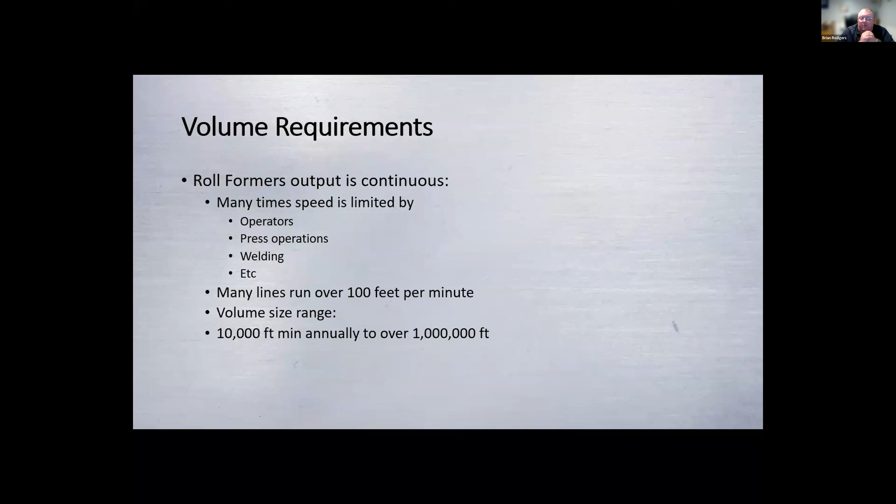Many press brake parts are converted to roll forming because of volume requirements. Roll forming output is continuous, and often you only need one operator. We like to set our automotive industry lines around 50 feet a minute, but in other industries 100 feet a minute is standard, up to 300 or 400 feet a minute. We usually like to see volume sizes of 10,000 linear feet up to over 1 million linear feet.